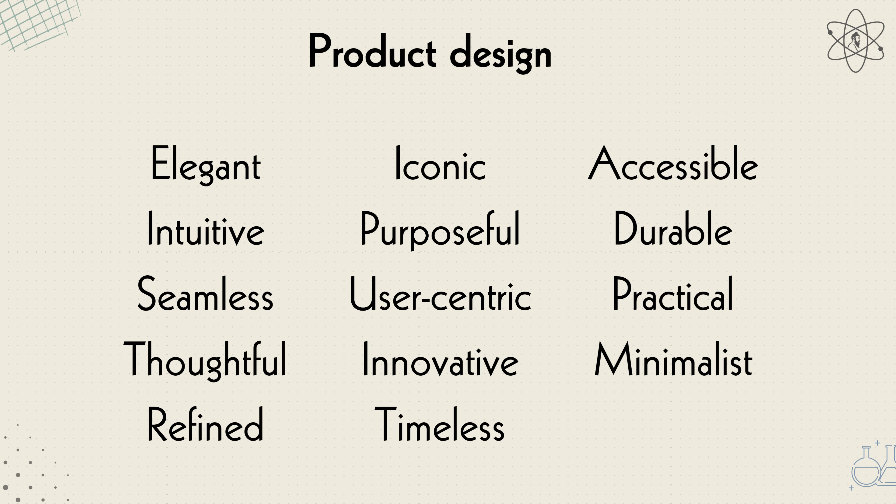Making a truly successful product isn't just about how it looks or what it does, it's about choosing the right materials. The best designs use materials that not only perform well but also offer great value and an experience that feels just right for the users.

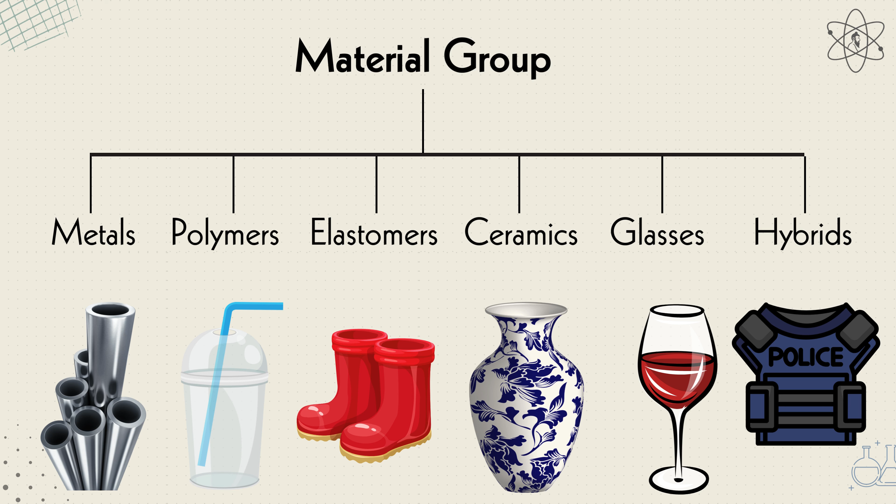In engineering, materials are typically grouped into six broad families: metals, polymers, elastomers, ceramics, glasses, and hybrids, also known as composites, which blend two or more of the others. This classification isn't just for convenience. Each family shares key traits like similar properties, manufacturing methods, and often even the type of application they are used in. The materials universe is like a hierarchy.

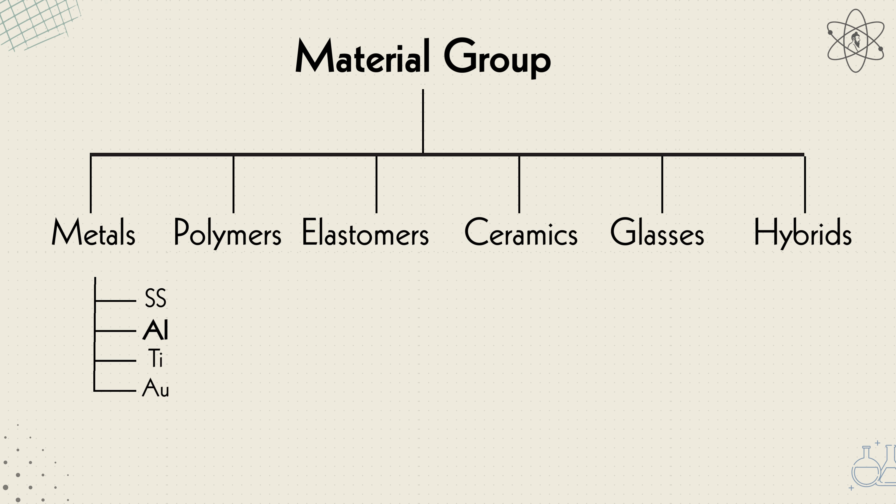At the top, we have broad families like metals. Within metals, there's a class called aluminum alloys. Dig deeper and you will find subclasses such as the 6000 series, and within that a specific material, alloy 6061.

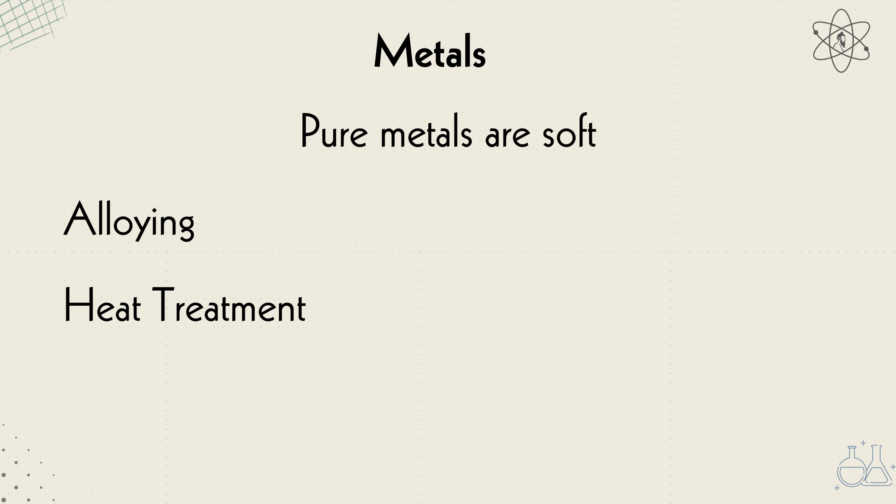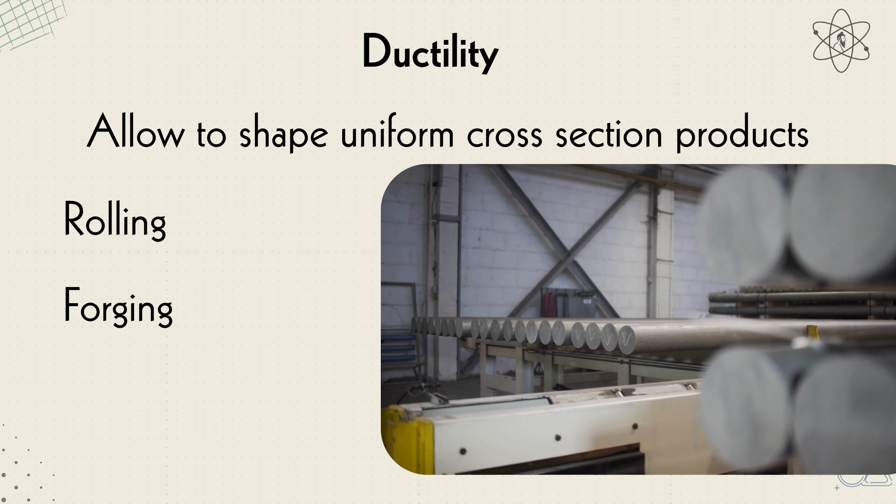Metals are known for their stiffness, something we measure using what's called a modulus of elasticity or elastic modulus. Pure metals are often soft and easily deformed, but through alloying, heat treatment, and mechanical processing, they can be made much stronger while still remaining ductile. That ductility allows them to be shaped through processes like rolling, forging, or extrusion. Metals are also tough with high fracture toughness, and they are excellent conductors of both heat and electricity.

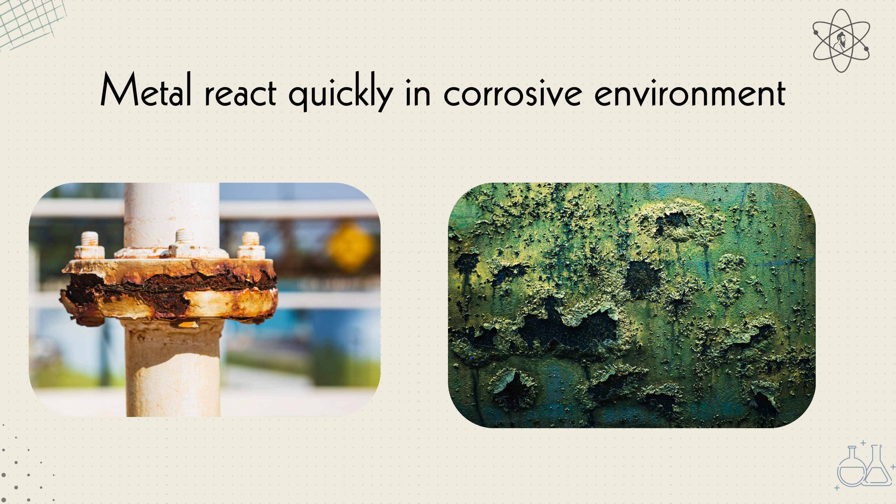But they are not perfect. Most metals are reactive, and if left unprotected, they corrode quickly.

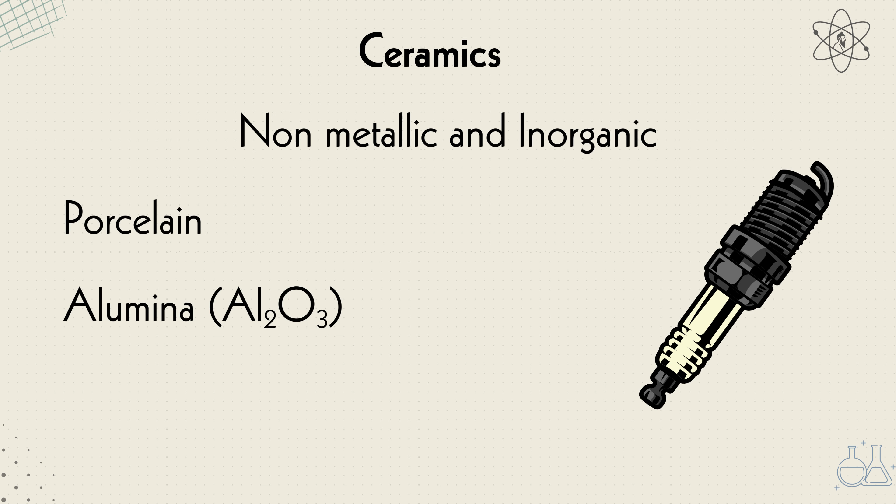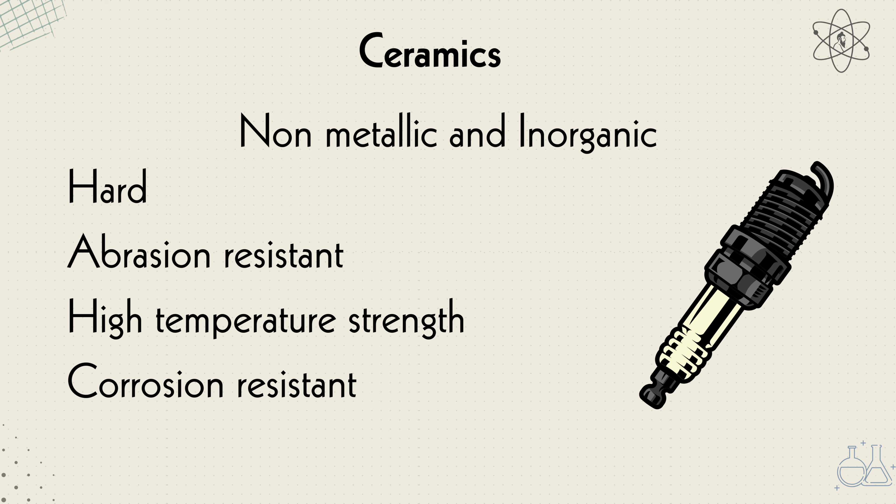Ceramics, on the other hand, are non-metallic and inorganic. Think porcelain or the alumina used in spark plug insulators. They offer a different set of strengths. They are extremely hard, abrasion resistant, and maintain their strength even at high temperatures. Ceramics also resist corrosion and are excellent electrical insulators, but they are brittle. Their fracture toughness is low, which makes them sensitive to cracks, holes, or any sharp points of stress. Their brittleness makes ceramics harder to design with compared to metals.

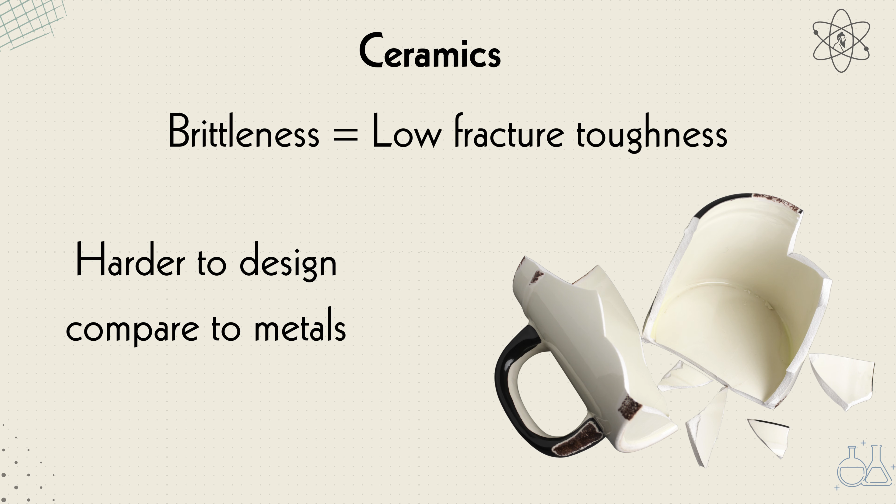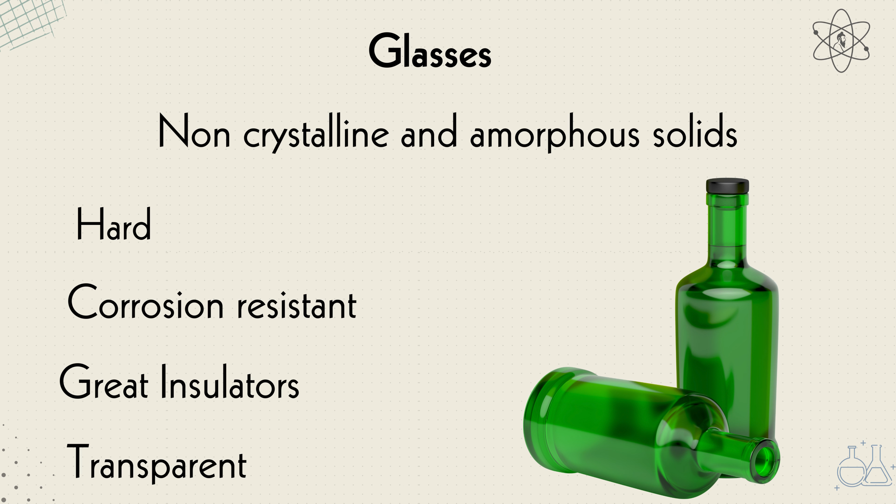Then we have glasses, non-crystalline or amorphous solids. The most familiar are soda lime and borosilicate glass used in bottles and kitchenware. Because they lack crystalline structure, glasses don't deform plastically. That makes them hard, highly corrosion resistant, and great electrical insulators. And of course, they are transparent. But like ceramics, their brittleness makes them vulnerable to cracking under stress.

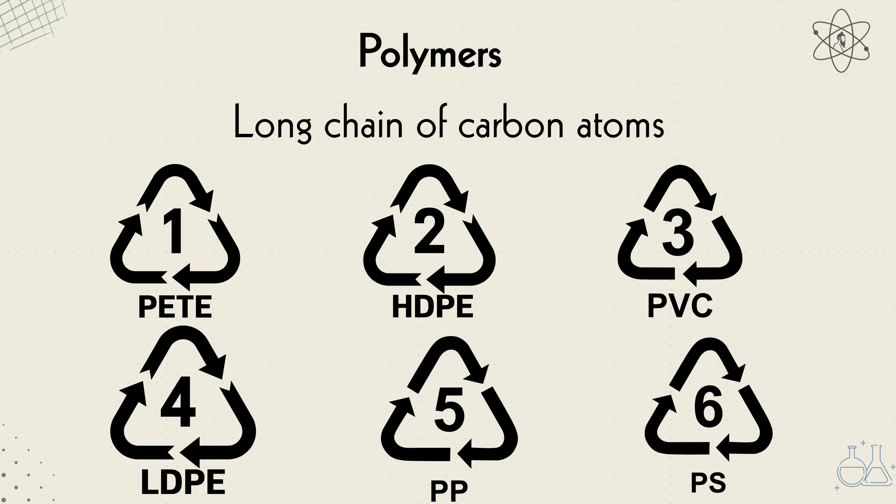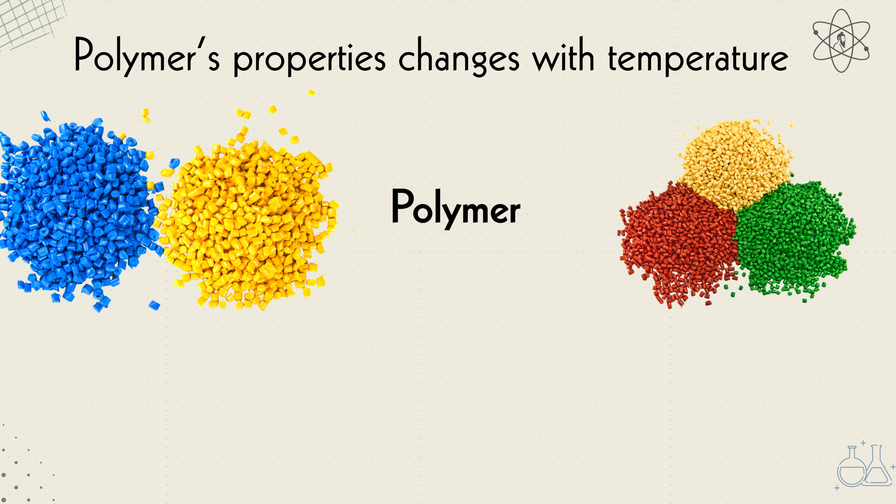Polymers are organic solids made from long chains of carbon atoms, and in some cases silicon. One of their standout features is how lightweight they are. With densities lower than even the lightest metals, polymers are ideal when weight reduction matters. But here's the catch: their properties change with temperature. A polymer that feels tough and flexible at room temperature might become brittle in a freezer or turn soft and rubbery in boiling water.

What makes polymers so widely used is how easy they are to shape. That's why we often call them plastics. Complex parts, even those with multiple functions, can be molded in one go. And thanks to their flexibility and snap fit design potential, they make assembly fast, efficient, and cost effective.

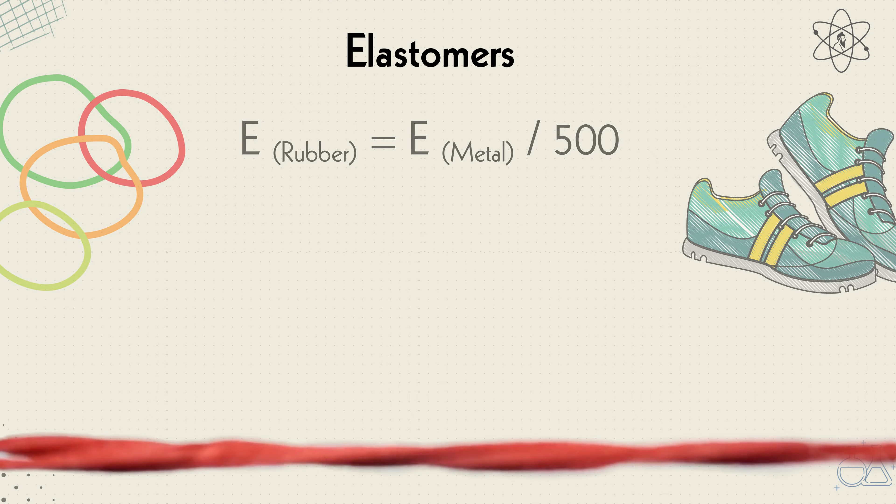Elastomers, found in everything from rubber bands to running shoes, are a special class of polymers. What sets them apart is their incredibly low stiffness. Their modulus of elasticity is 500 to 5000 times lower than that of metals. But the real magic lies in their stretchability. Elastomers can be pulled to many times their original length and still snap back to their original shape when released. It's this unique combination of flexibility and resilience that makes them so useful in everyday products.

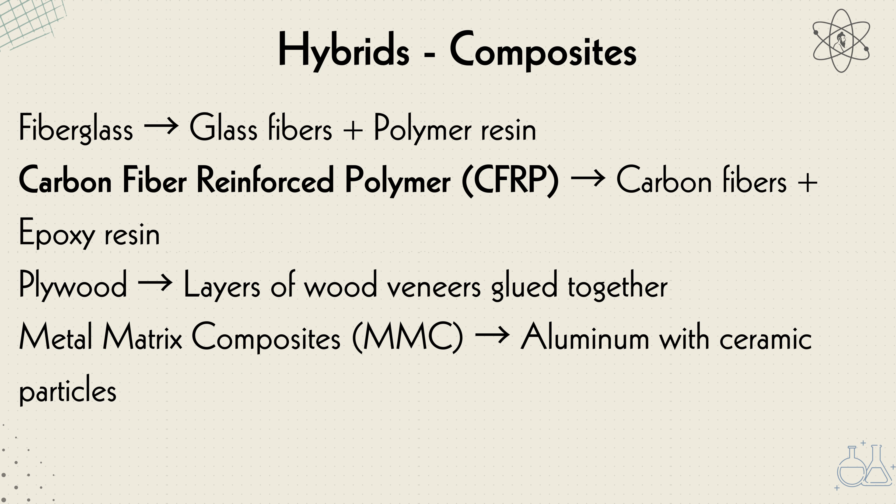Hybrids are materials made by combining two or more different substances designed to bring out the best properties of each. Glass and carbon fiber reinforced polymers, known as GFRP or CFRP, are great examples. Interestingly, nature has been using hybrids all along. Materials like wood, bone, skin, and leaves are natural hybrids. Take bone for instance: it's a combination of collagen, a flexible polymer, and hydroxyapatite, a stiff mineral.

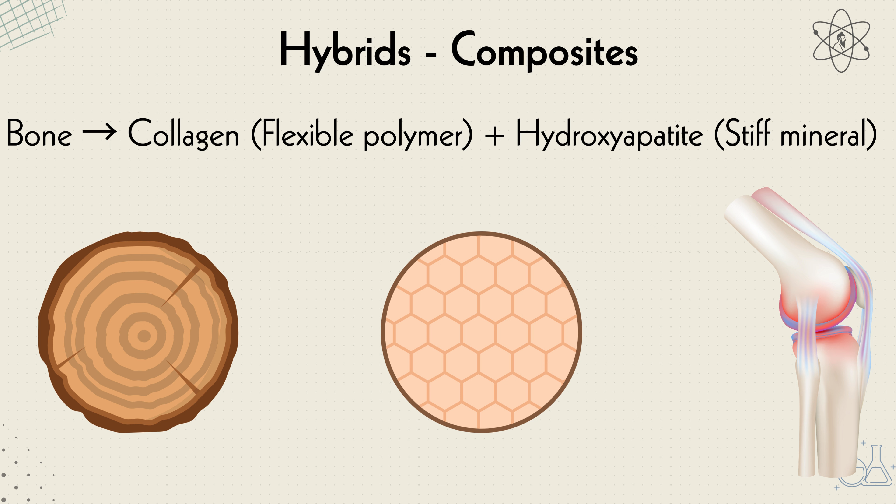Together, they create a material that's both strong and resilient. But choosing the right material is only half the story. The other half lies in how it's processed—how we shape it, join it, and finish it to bring the final product to life.

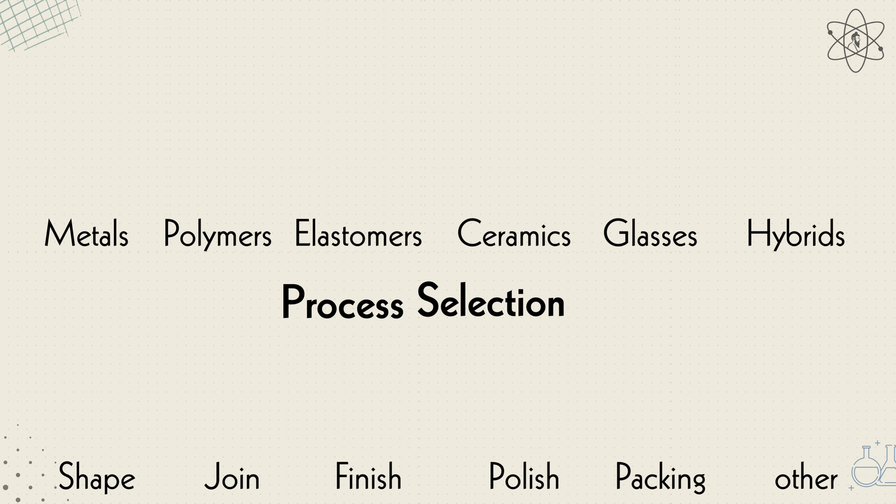A process is simply the method we use to shape, join, or finish a material. From casting and injection molding to welding and electropolishing, there are hundreds of processes available. Choosing the right one early in the design stage is crucial—waiting too long can make changes expensive and complicated.

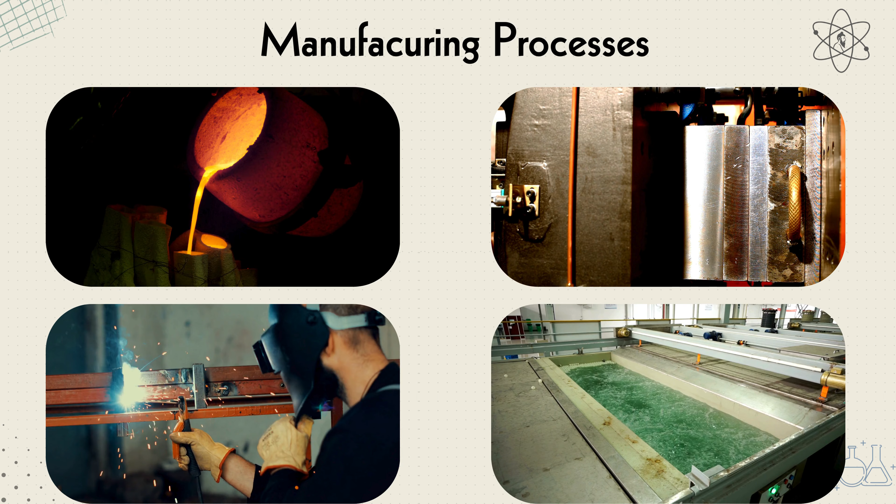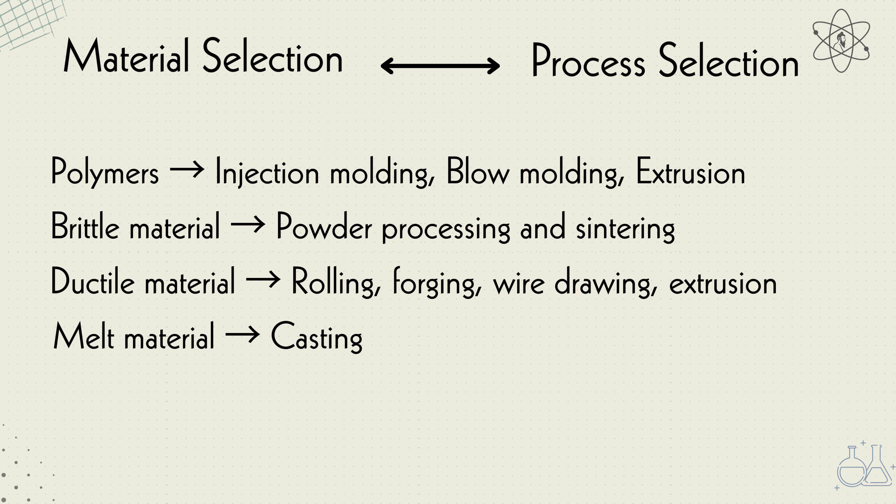Your choice of materials directly affects the processes you can use. Polymers, for example, can be molded. Brittle materials can't be forged like ductile ones—they need alternative methods. If a material melts into a low viscosity fluid, it can be cast. If not, we have to take a different approach.

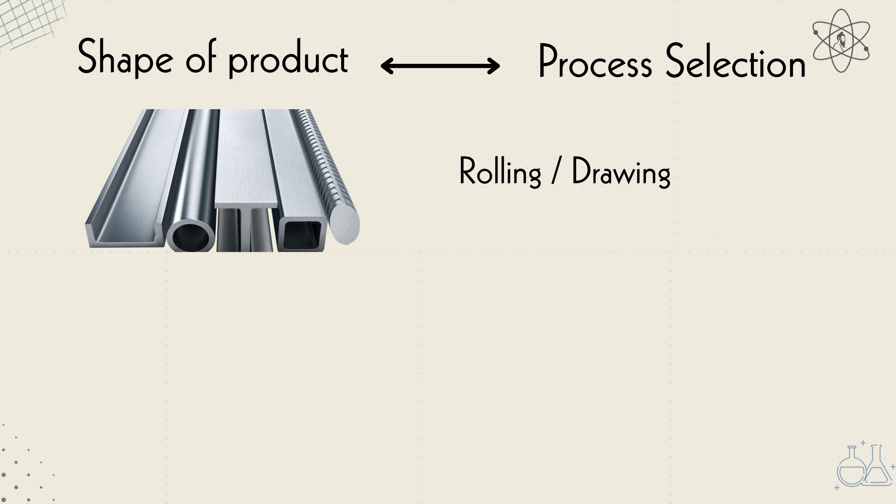Even the shape of the final product matters. Long, slender forms are perfect for rolling or drawing, but difficult to cast. Hollow parts you can't forge, but you can mold or cast them. In the world of material science, every decision is connected.

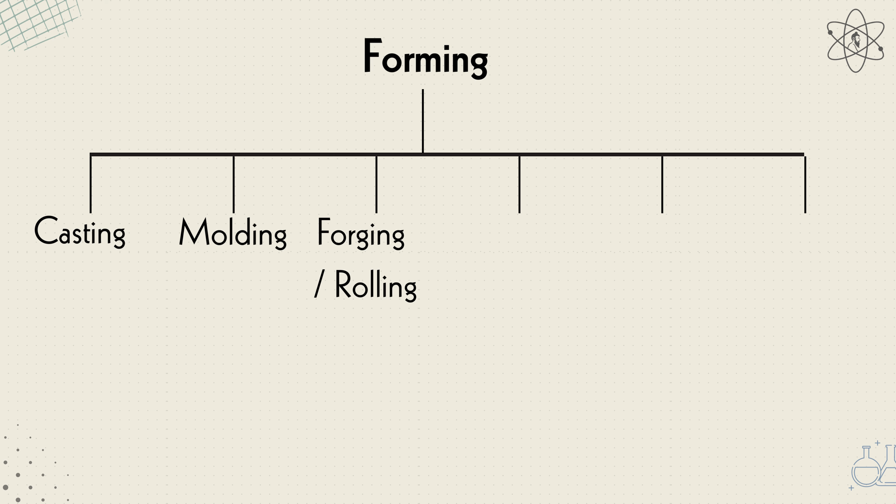Forming processes are the foundation of manufacturing. The first row includes six primary methods: casting, molding, deformation processes like forging and rolling, powder based methods, composite forming, and special techniques like rapid prototyping or 3D printing.

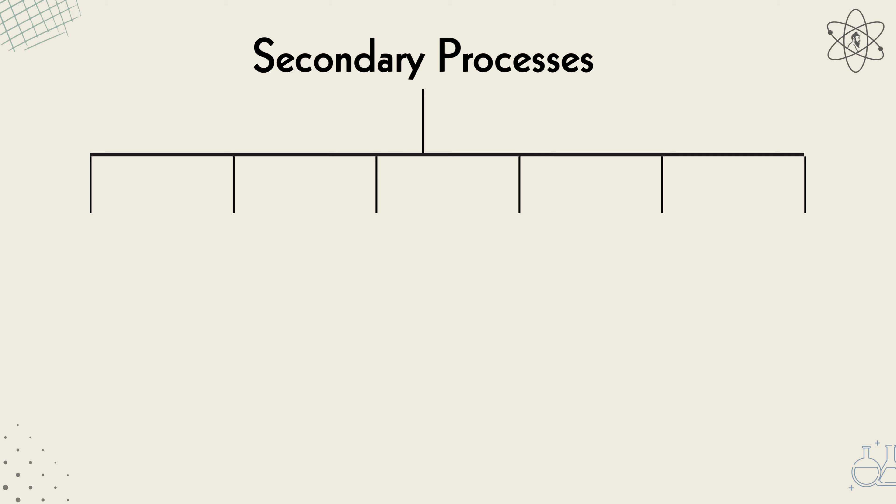Once the basic shape is made, secondary processes come into play. This includes machining to add detailed features, and heat treatment, which improves the surface or internal properties of the material. Together, these processes shape not just the form but the function and performance of the final product.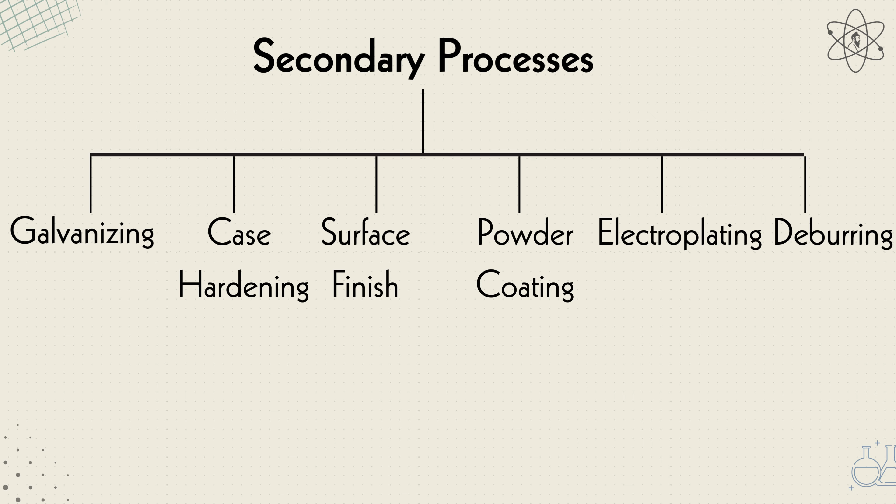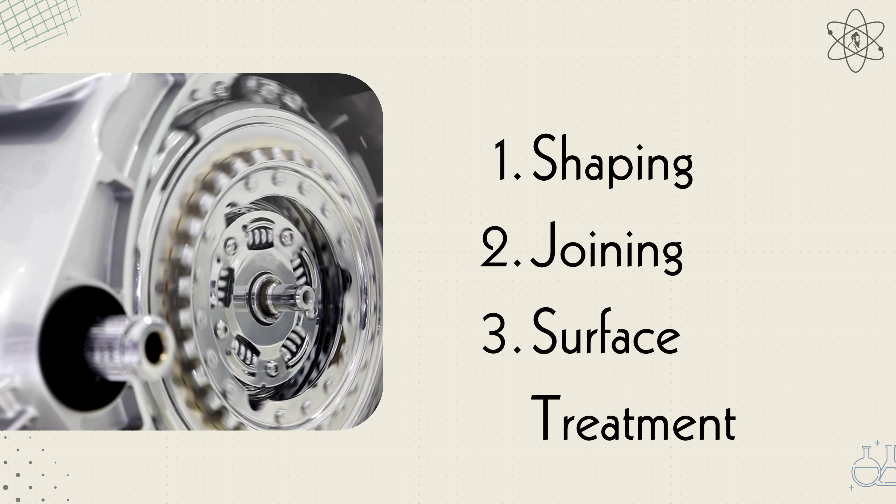In the world of manufacturing, the process universe is divided into three main families: shaping, joining, and surface treatment. Let's start with shaping—this includes major process classes like casting, deformation, and molding.

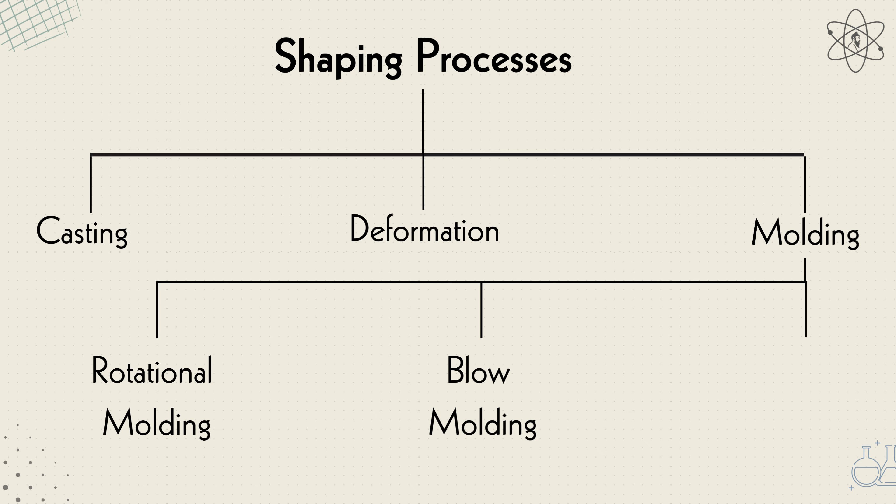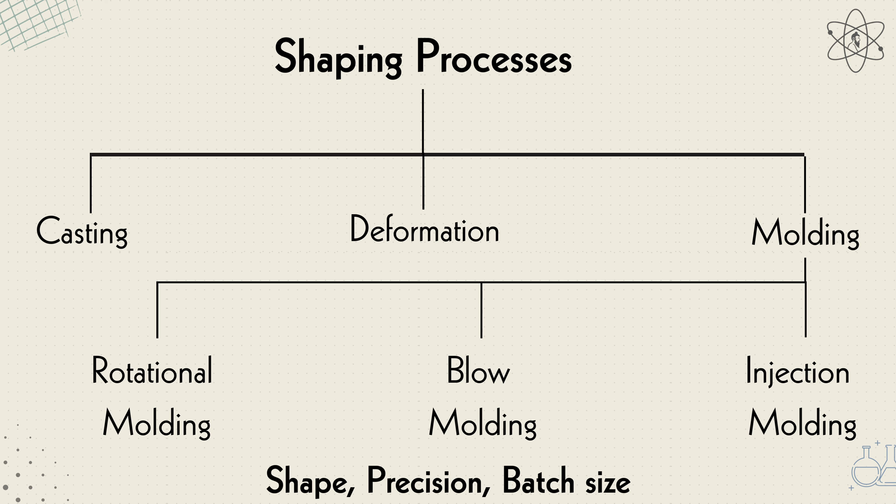Take molding, for example. It branches out into more specific methods like rotational molding, blow molding, and injection molding. Each of these has its own strengths and limitations depending on the materials, the shape, the required precision, and even the ideal production batch size. Processing doesn't just shape materials—it can transform their properties.

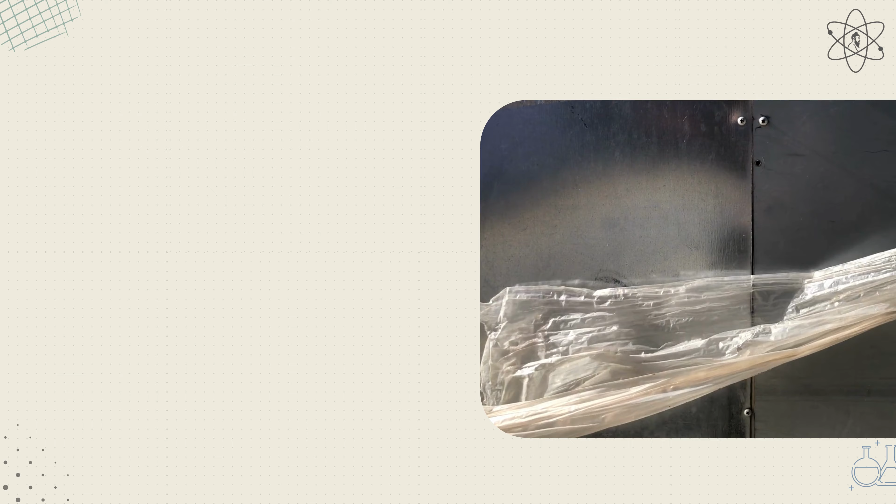Take forging, for example. Hammering a metal makes it harder, but heat it afterward—a process called annealing—and it softens again. Even plastic shows this behavior. Polyethylene, the material in plastic bags, becomes five times stronger when stretched into fibers. And soft, flexible rubber becomes hard and brittle when vulcanized.

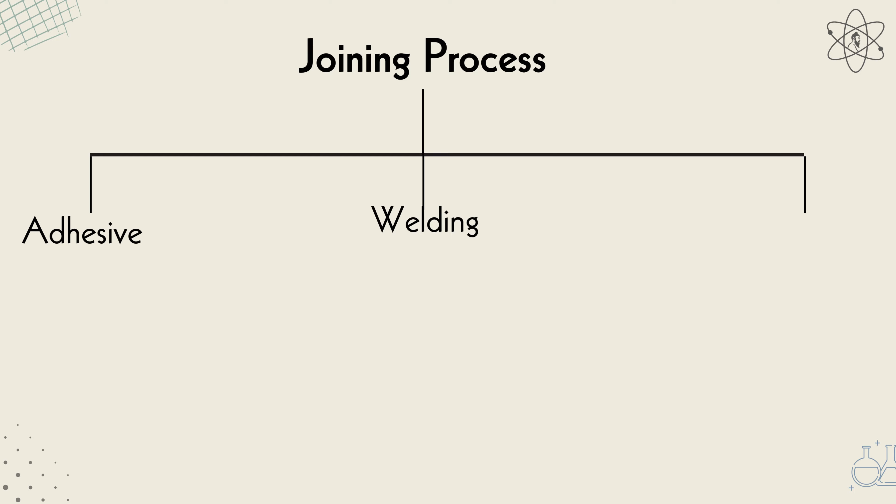When it comes to joining, there are three broad classes: adhesive, welding, and mechanical fastener. Each plays a critical role depending on the materials involved and the performance needed from the final assembly. Joining also changes the material behavior. In welding, parts are melted and fused together, but the weld zone often ends up with different, and usually worse, properties than the rest of the material.

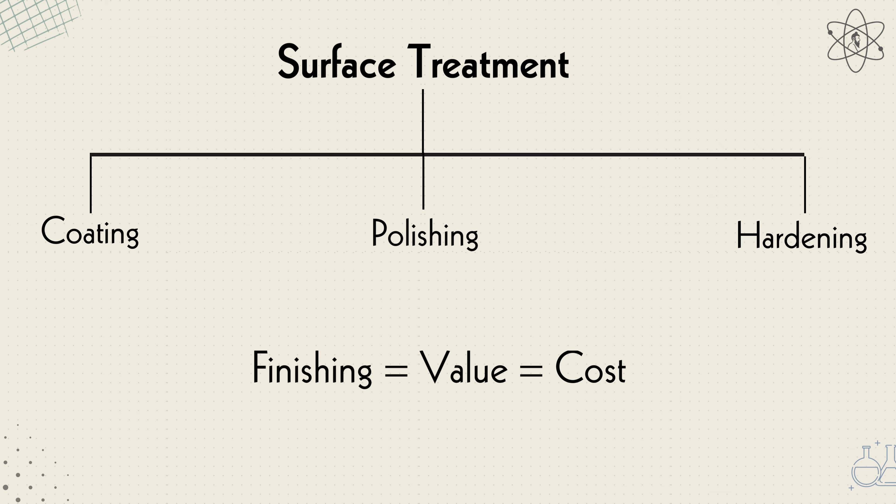Finally, we have surface treatment. This includes finishing processes like coating, polishing, or hardening that don't change the overall shape but enhance the surface. Finishing adds cost, so it must add value—by protecting the surface, improving durability, or simply enhancing appearance. Surface treatments are generally used to enhance performance. Electroplating protects against corrosion, while processes like carburizing make surfaces tougher or more wear resistant.

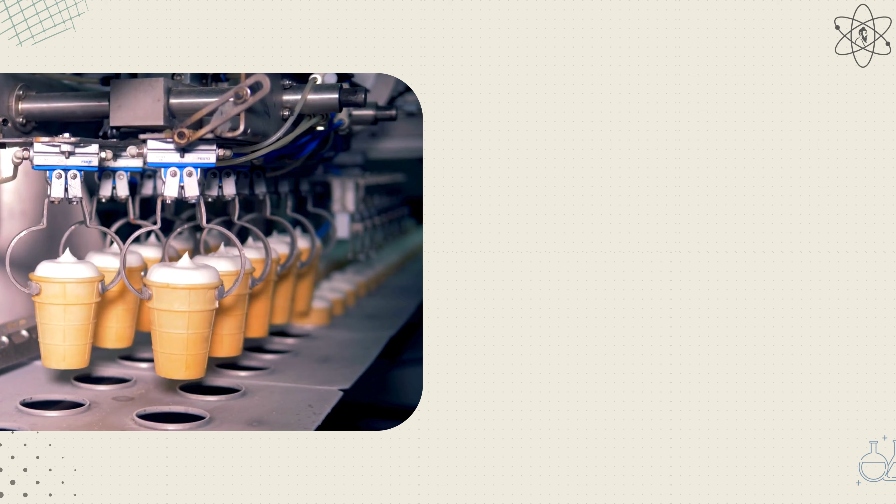In every case, processing isn't just about shape—it's about engineering the right properties exactly where they are needed. Materials and processes shape everything around us, from the things we use to the way they perform. Smart choices in both lead to better, stronger, and more efficient designs.

So now you understand the basics of the manufacturing process. We will learn in detail in our future videos.